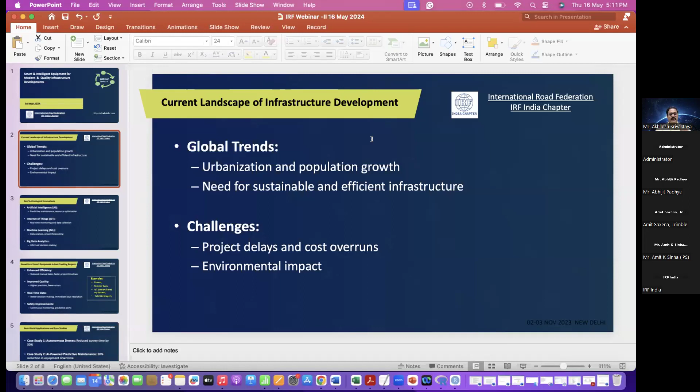As per the Government of India Ministry of Statistics data, roughly 41% of big projects are having cost overruns and time overruns. And apart from this, these delays are not environmentally friendly - they degrade the environment also. Here, if we have good equipment, intelligent equipment, they utilize the materials very optimally, thus making it more sustainable and environment friendly.

What are the trends or innovations currently happening? Our experts will be talking around these. Artificial intelligence, which is very well known - it's now in every sector. Yesterday I was talking on AI in a conference on World Telecom Day. AI has a presence everywhere, from the health sector to fintech to construction. So in construction equipment, the moment AI is put in, the optimization and predictions become a very different level. So how this is being used, we'll be talking on this.

Internet of Things, another feature which has come up and is gaining very big momentum. As per studies, by 2030 almost 70% of equipment, machineries, house and home appliances and things will be connected with an IoT device. This is the prediction of NASSCOM and many experts. So the people and things are almost real time connected - you get the data directly from the site or through these IoT devices.

Machine learning gives you forecasting and predictions, helps in decision making. This is one of the bottlenecks - it resolves the bottleneck of delay in decision making and all. Big data analytics is the outcome. When we do analytics, we come to know what are the trends, where we can optimize, what can be best done for the next project to further reduce the time and cost in that.

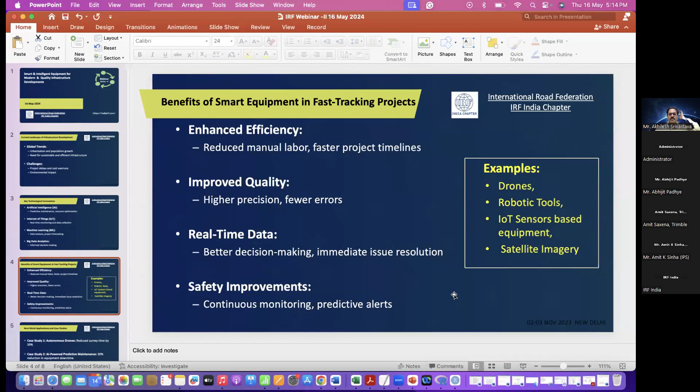And naturally, safety improvements. For example, in high-rise buildings, as is happening in many advanced countries—like I saw in Dubai—even the cleaning of the facade in high-rise buildings is being done through drones. The quality check is being done by high precision cameras fitted into the drones. Satellite imagery, which Amit will talk about, maps and tells even the growth of plants, how it happens. So there are many things. These improve safety, and people are not required to go to places which are difficult or uninhabitable.

Similarly, there are a few case studies we checked when discussing the relevance of this topic. You can see drones can reduce survey time by 50%. Instead of a person physically going there to map it, especially for highway projects, the moment you use a drone, the visibility or the idea from a height taken is an entirely different level, and gives you better comprehension about the projects. So it reduces time.

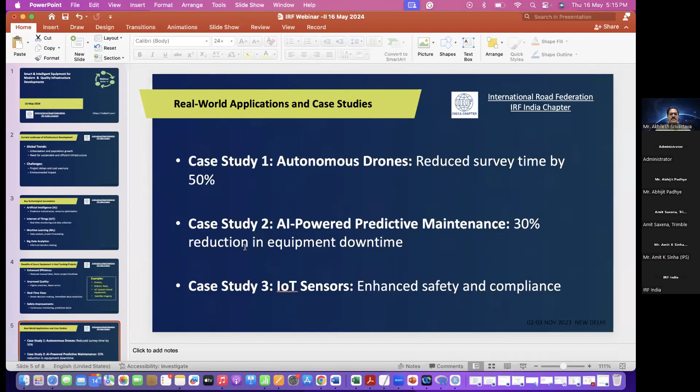AI powered prediction modules—in maintenance, the machines themselves say that my maintenance is due, or my oil is depleting, and so on. This is a study done by McKinsey which says there's nearly a 30% reduction in equipment downtime if you use this. And IoT, of course, helps for better site management or in gaining knowledge.

But there are certain challenges. The moment you put this technology into equipment or make them smart, the cost goes high. So who is going to bear it? What will be the ROI? That is a serious challenge. And the top management who haven't yet seen the benefit of this are generally hesitant. So how they are being convinced, or what should be the pitch to them—I will request our experts to talk on that.

The skill gap—for this, you require a different kind of skill on the ground to operate these things, and that is still lacking. So more capacity building training programs are required. Integration with existing systems is also a challenge, because if somebody is having SAP, then data should seamlessly flow into that system and help, rather than creating another weird system which is difficult for people to understand and cope with.

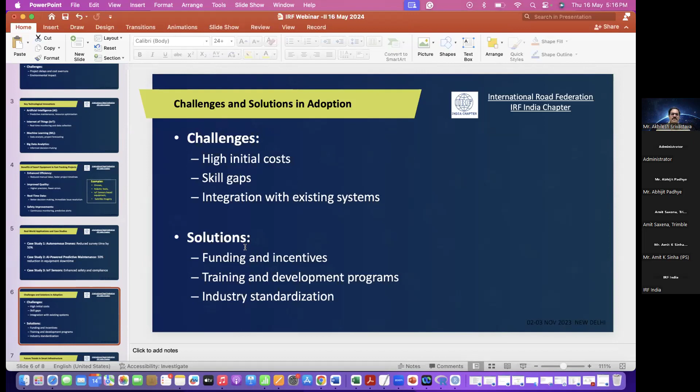And then what are the solutions? The initial cost can always be muted through different funding incentives, and a lot of work is going on in training, development, and industry standardization.

These are certain things, but there are a few more topics I just want to give a glimpse of. For example, the metaverse—I witnessed a project on my recent visit to Geneva, where the planning, the DPR, is now being made through the metaverse, and you can fit everything in. They were putting a very complex structure into the metaverse and checking with different parameters which is the best and optimal design. So metaverse is another very helpful thing.

Blockchain and 5G are the upcoming things which are going to make IoT and these equipments even more smart and intelligent.

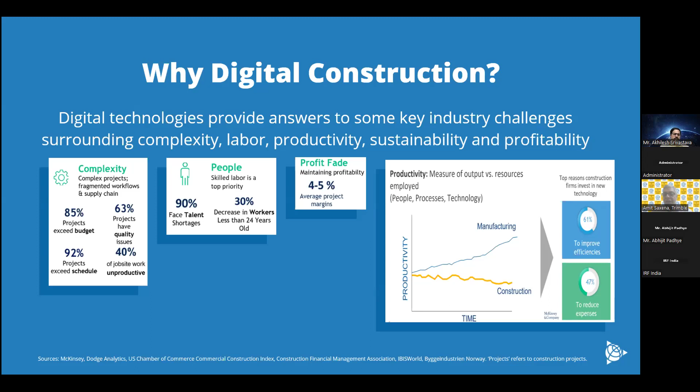We have adopted a lot of technologies on the construction side, but there are fundamental issues we need to work on. I've brought these slides to show the nature of issues we have. On the survey and design side, there is a challenge, based on feedback from our customers, that there is always difficulty in having survey data acceptance across the entire life cycle of the project. Between the preliminary survey and the detailed survey, there is always a gap in the quality of data being collected.

Integrity issues, whether the data was collected properly or not. Design facing challenges with accuracy of this data when they go out and start construction, or even while doing the preliminary and detailed survey. More importantly, how do we use this design data, which is the basis for any project in the field with highest level of confidence. And while using this data, how is construction being carried out, and what changes have to be made back into the design depending upon local conditions.

We have many examples where these technologies are getting adopted, but this is a very simple aspect we can work on. On the construction side, there are quality challenges with the machines at the construction site. Obviously, there are productivity challenges in terms of rising costs on the field, the raw material cost, and the equipment which is quite expensive. I'm sure Abhijit will talk about them.

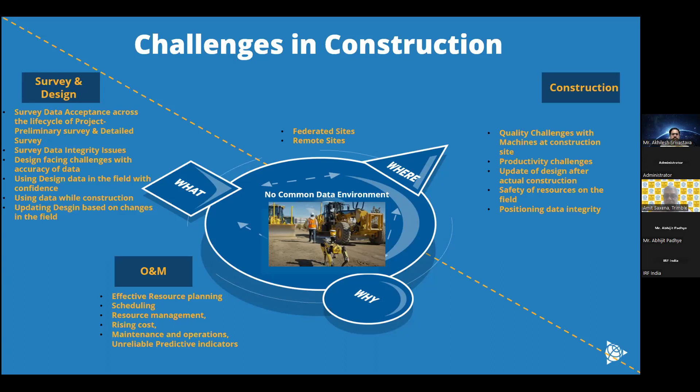One of the key areas we are working on is ensuring that the design and back office team, which is in the office, and the survey field team are working in a seamless manner. So we found a way wherein, if we start a project from the office rather than giving entire access to the design to the field, I think that saves a lot of time.

As soon as the surveyor is in the field, the project where he is collecting the data can be verified almost in real-time, without waiting for email or pen drives or any other form in which data is being transferred. So this is a very unique value proposition that we have.

Our project starts from the office, which is on the left-hand side. It's only a file. When the survey team goes into the field, they need two things. One, verification of the data in the first few hours of collection of data. Secondly, the design is also given to them while they're in the field.

They can load that design file, whether it is in the form of a scanned copy, or they have an actual design model which they can verify. And I will show you some videos that will help you understand this.

Last but not the least, we have also seen people moving from one technology to another while working. For example, people will use a design modeling software, which is a necessity. They will use different sensors in the field, like we were talking about, whether it is a GPS sensor, which is much better at collecting land data than a total station, which is a traditional form.

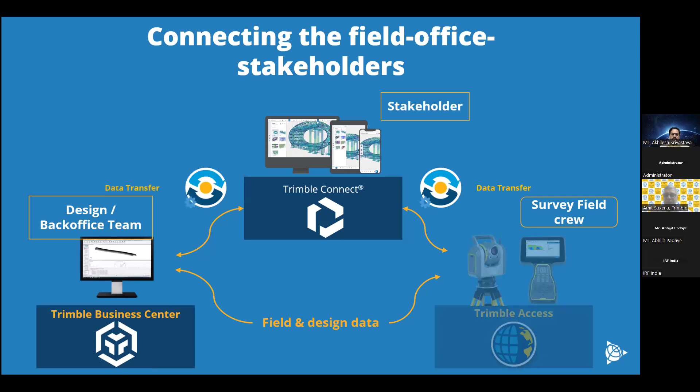So these are the devices that are used. Now, the classic example is here, wherein we can work on a model which is being created in a modeling software at a central place within the office. You don't need a modeling software for using the survey data along with it. The model can be straight away imported into the central engine that I was talking about.

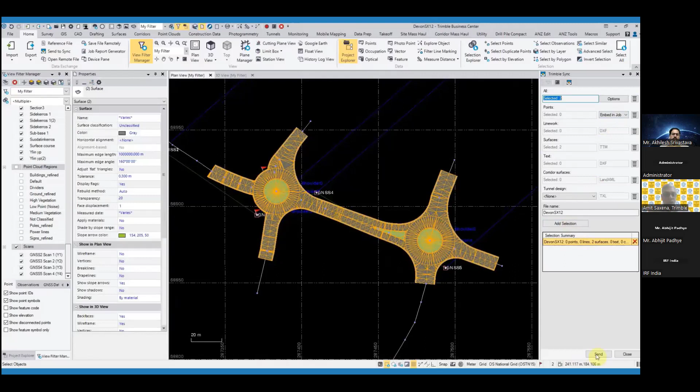Just as an example, how it could be shared with the field: in this case, there are two sections currently being used. Once they are selected in a technology called Trimble Business Center, it can be embedded into the project that I was talking about. Here you can see that the file with some level of geo-coordinate information is being added to the project. With a click of a few buttons, that folder goes directly into the field through the cloud services.

So here we are utilizing a lot of ease to share the data in the field. Which file, how it was sent, when it was sent, can always be avoided between different stakeholders. In a click of a button, the job file has been updated, and the coordinate systems, which are global coordinate systems, are also being done, and now it's embedded into the system. You can see the orange colored ones, which are the new files, and they're saying okay, create and send it across. So this kind of technology can help you integrate your design and survey data with ease.

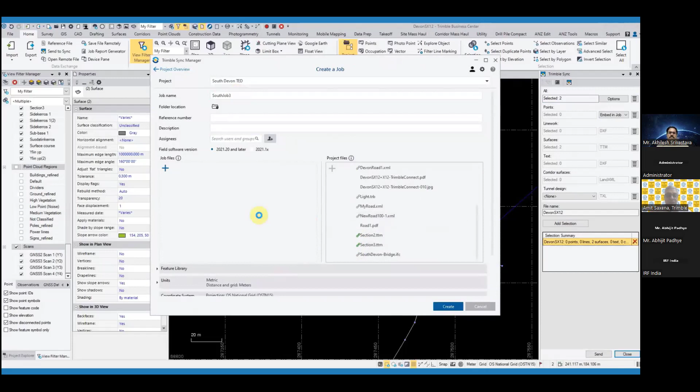So this is done. Now the next level of information is how you verify that it's a new job that is being built. When we go to the field, this is the field access. Straight away you can see on the right-hand side, once you refresh it, this symbol will change. They have two job files which are embedded, and you can download them, and you see different symbols.

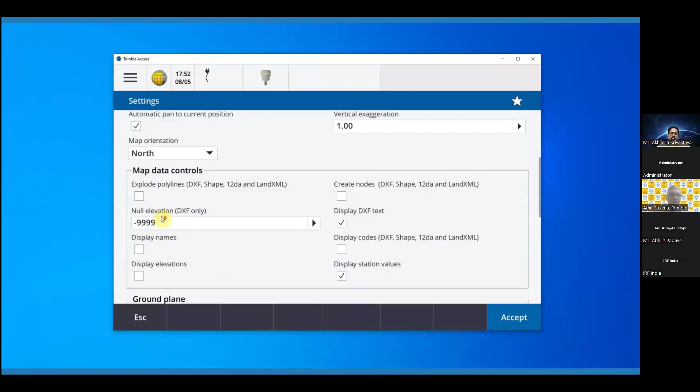So both the sections are now actually in the field on the controller that the person is using. This kind of data is now visible to them. We can make different options, whether it is a DXF file or IFC. We can decide on the basis of our requirements. See, this string is available there.

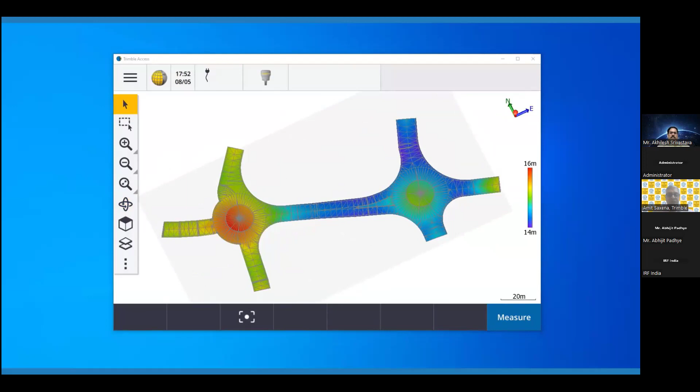Now in the background, we have also seen that people use different kinds of technologies, including Google, etc. That also is not required. On the field itself, there is a facility of Trimble Maps, which is being updated quite regularly. The same can be viewed in a different layer to check the validity of this data. Further, at the backdrop, you can see Trimble Maps is being used, and that's how you can visualize whether the design that they have created is fitting onto the site.

And also, when we start doing the integration of other sensors, like in this case the scanning is being used to capture the data which is actually physically present in the field, and they are being placed in different layers. So you can actually visualize the scan data which is actually in the field, and also the model here. So it's just a simple task for a person to have a look, and at any point of time they can switch on and switch off these layers to check whether the integrity of data is maintained or not.

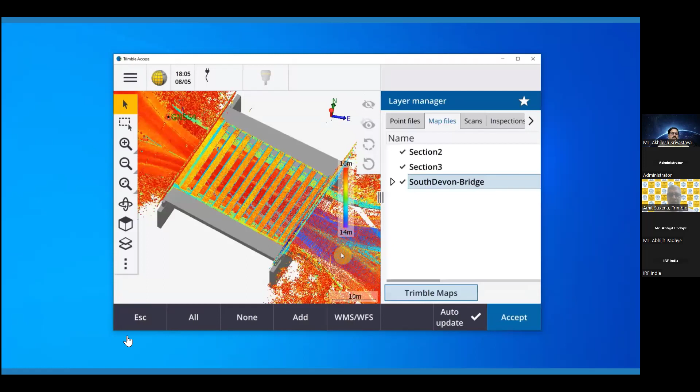So I'll keep on moving. So here they are accepting and uploading the work. We don't need to wait for the work to be done. And in this case, the inspection and the scan data is also being verified at the same time.

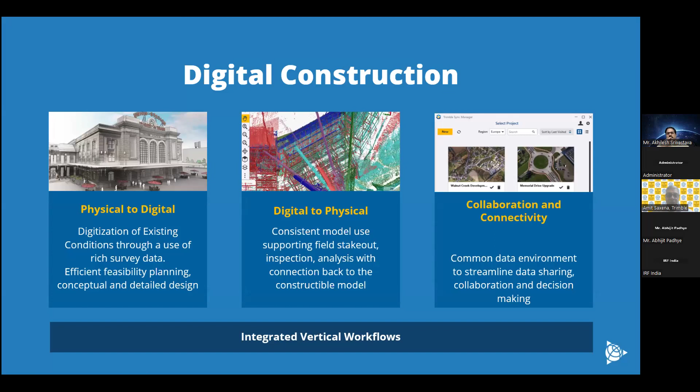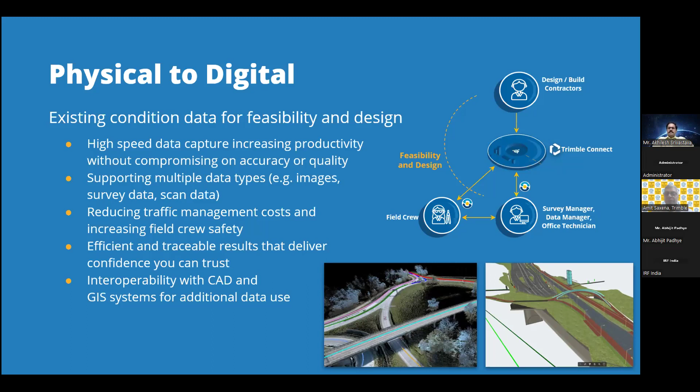In terms of the next level of requirement, how physical to digital and digital to physical world integrity is being done: a very simple task, as I was talking about. The data will be captured at a very high speed and also with highly accurate data. You can take data from drone, mobile lidars, GNSS, total station, and any kind of sensors that are available, and bring them to the same place. Without disturbing the overall workflow, through the single system, we are able to generate the data.

Same goes for digital to physical. We were talking about MR. We have a technology wherein you just need to load the model and start placing the QR codes. Once you start doing the construction, and when you stick those QR codes on the site, and scan through our technology, you are able to visualize how the construction will look like in comparison with the floor plan, or 2D drawing, or with the 3D model.

This is a classic example. I will just play it quickly. There is a sound in it, but I know there is a time that I am maintaining.

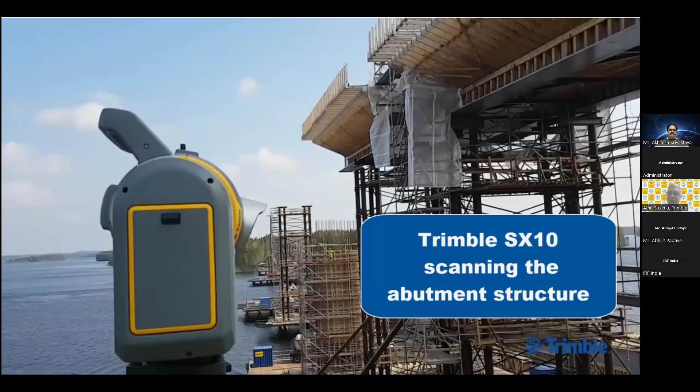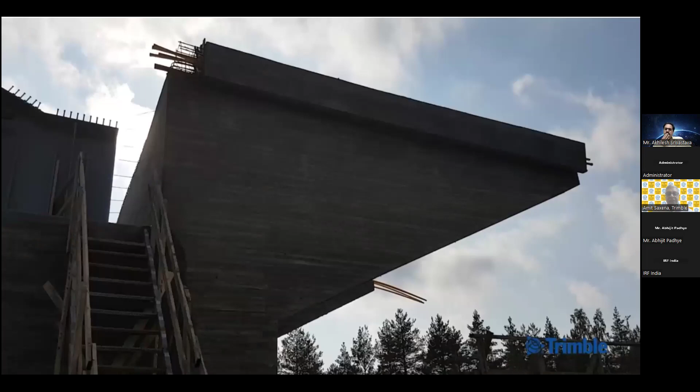This is a good example wherein the scanning has been taking place of an actual site of bridge construction. In this case, the same machine could be used for doing the total station survey, then doing the scanning, and then we integrate both design and the scan data at one place to check how the systems are behaving.

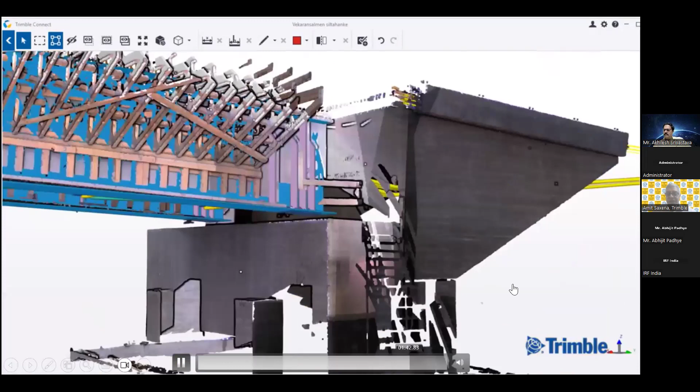Now the model and the point cloud data is being integrated in this case, so you can verify the checks and work on it. These kind of outputs can be easily generated, wherein we can check the height of the scan data or the bridge, and that can be done very quickly.

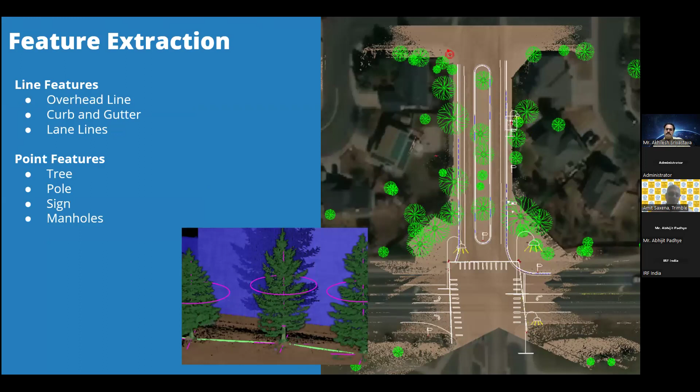Further, we can do the automatic classification of the system, including buildings, vegetation, wire lines, electrical lines, poles, etc. Even the feature extraction for environmental concerns - we can have a number of trees available in a project, and the girth can also be calculated.

In terms of one interesting concept, I think I can move on with this - another real-time monitoring example of a Tapi bridge in Surat, wherein our systems are working with integrating multiple sensors.

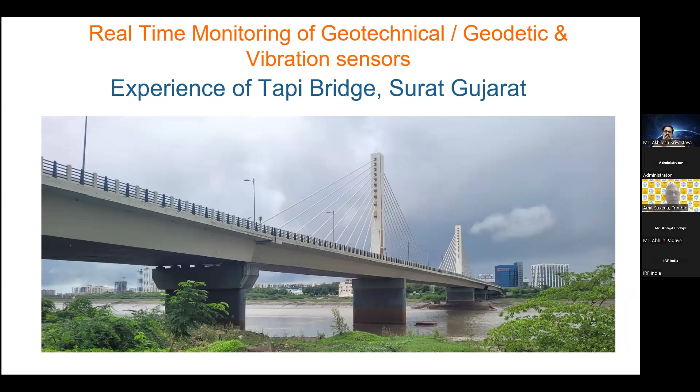This is a very nice example wherein multiple geotechnical and geodetic sensors were used. On the right-hand side you can see the GPS data, automatic total station, weather data, seismographs, crack meter, extensometer, stress sensors. They were all integrated to Trimble technology so that you can generate reports.

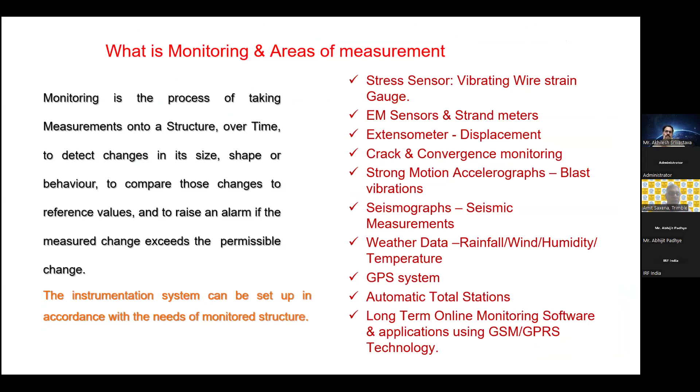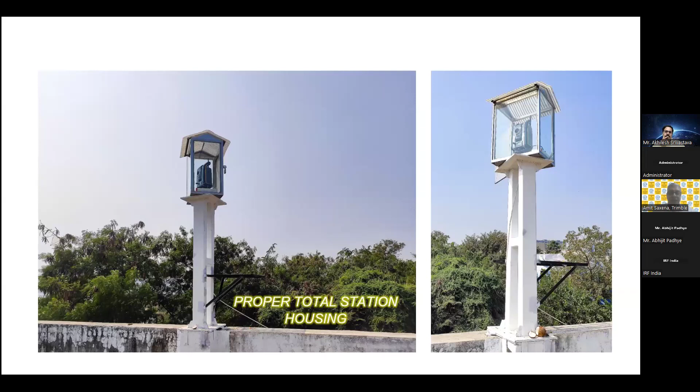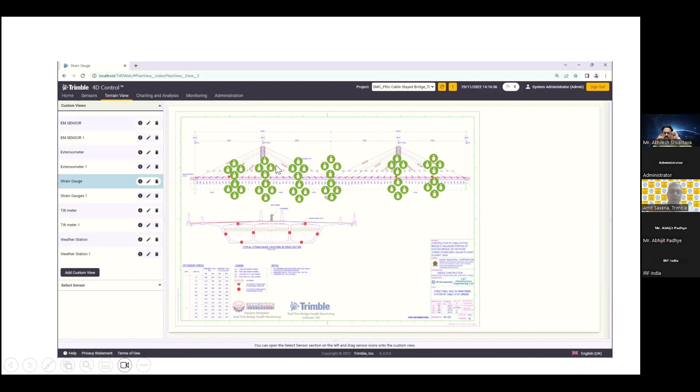You can see this kind of reports - where all the sensors are being mounted, whether they are on the cable or below that. And these are the targets that are being placed on the bridge.

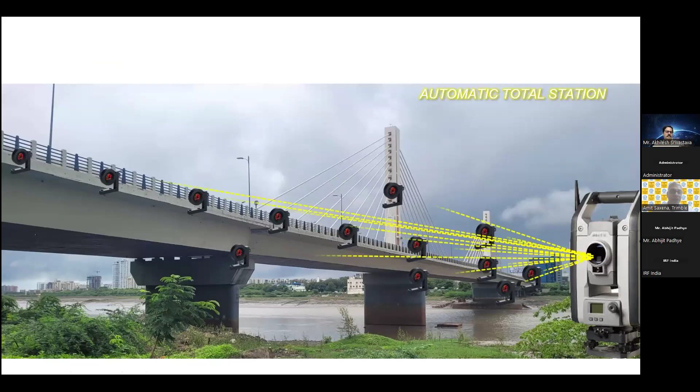So all these things, once we connect with the system, automatically the data is collected at our central place, and you can define the parameters within which the alarm will not go off. As soon as there is an anomaly, the alarm will go off or an SMS can be triggered.

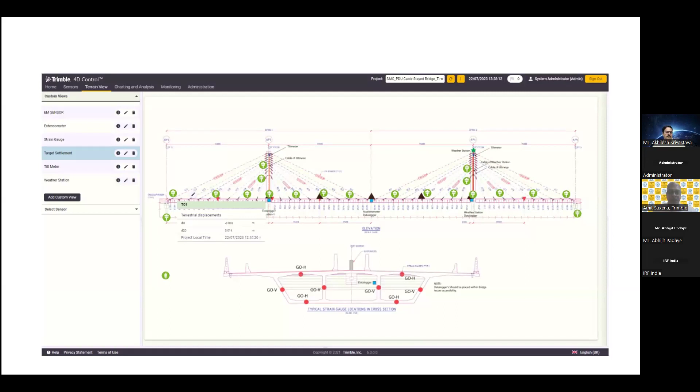Now, moving on to the construction side, I think what we are looking at is moving from conventional construction to data-driven digital construction, wherein we integrate the heavy equipment machines with our positioning technologies, and we are removing the human safety hazards, stakes and strings, and daylight constraints which are normally seen, and also the accuracy that is not being achieved. So what we are doing is using the same technology to feed the data back into the machines.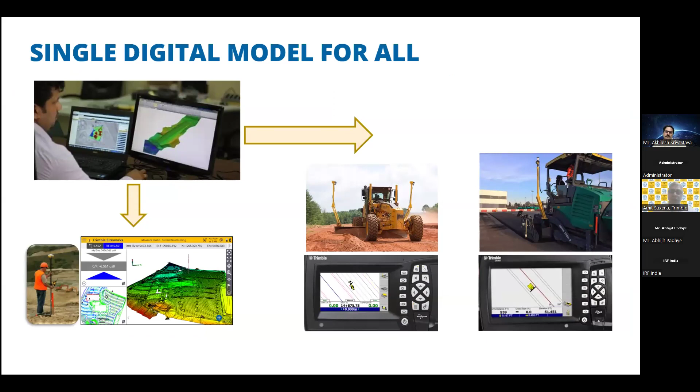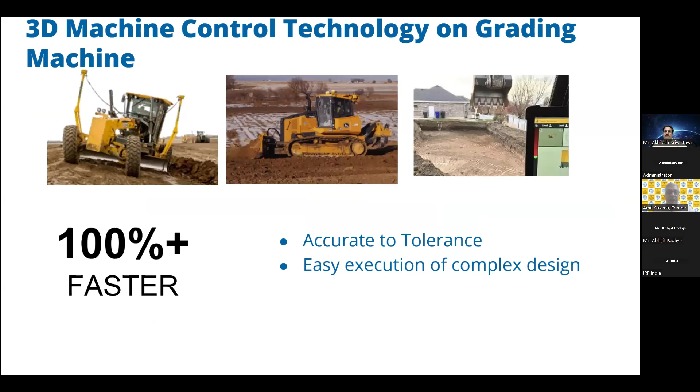We have a very good example in terms of the highway being constructed near Lucknow, wherein the work and the 3D machine technology is being used with our systems. You can see that they are faster, accurate, and this is a very good example wherein the work is happening at night, which was not possible earlier because of the positioning technology.

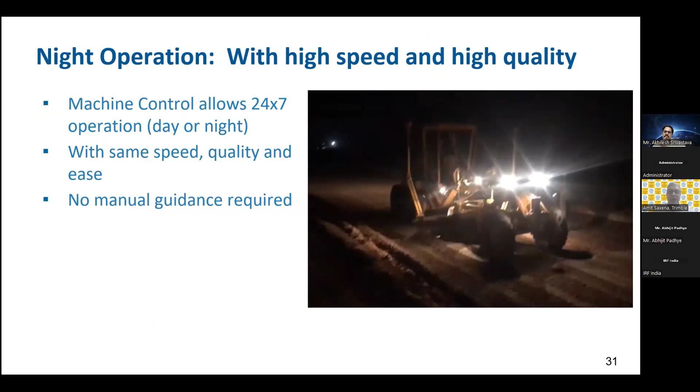The blades of the system move as per the GNSS sensors controlling the movement and placement of these blades. So these are machine-guided systems which are in the field.

If we look at the next part, it's compaction and paving, wherein we see 30% saving, and these figures are coming directly from the field. This is a very good example compared to the conventional form - this data comes from the project itself, and I think Abhijit probably would be covering this, but I'm just giving you a highlight.

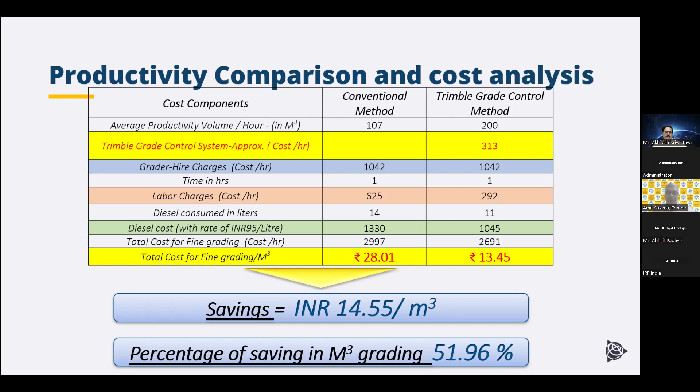With the conventional way and with the Trimble Grade Control method, you can see the cost is being reduced by more than half, with all costs being taken into account, whether it's diesel cost consumed in terms of the runs happening, or fine grading cost, or the number of charges taken for grader hire in terms of cost per hour. So there is a very high saving in terms of using our technology with the graders.

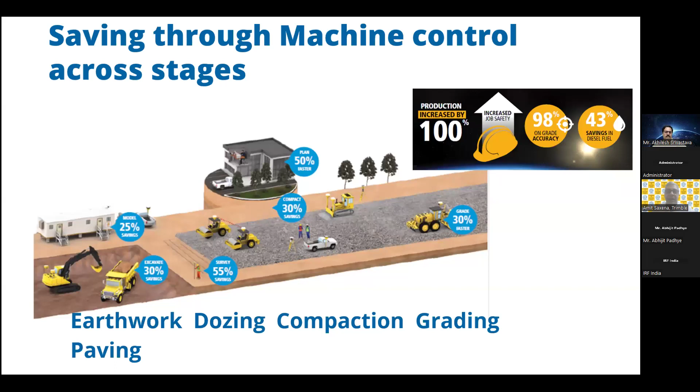And there are different steps at which the saving can happen. With limited time, I can talk about some of these, but there are many other areas where we can work upon, and we can have all these kinds of benefits.

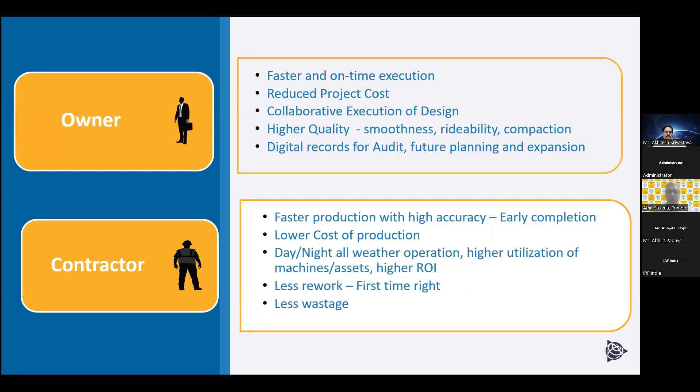And last but not the least, we take care of the environmental parameters through our multiple technologies, and these are the sensors we talk about. If you have any questions, I'm ready to answer them. This is what I have today, sir.

Thank you, Amit, thank you for a wonderful presentation. I think you explained things in very detail. I think some questions are there, we'll be taking it at the end of the presentations. No problem, sir, thank you. It was very exhaustive, I think audience must have learned a lot today.

Now moving to our third presentation today evening, to Mr. Abhijit. Are you presentation ready, Abhijit? Yeah, yes. So Abhijit is an engineer with a master's in marketing management, and he has 32 years of very long experience, served in many renowned organizations like Kirloskar, Ingersoll, Voltas, Volvo, and now he is heading business at Gainwell for allied business with products from Lintec and Linnhoff Holdings in that company. So he's a business head, let him speak and tell about the product. He's an expert, you can see he spearheaded a lot of new technology products throughout his career, from micro surfacing machine, from Etnyre to the Eurotech concrete and many more. So without taking much time, I will request Abhijit please take over and start your presentation.

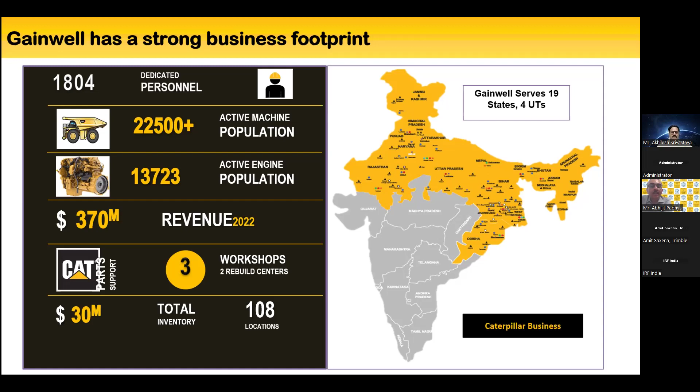Active machine population is 22,500. Out of that, engine population is 13,000. Revenue done is 370 million. Inventory again of 30 million. Gainwell is also associated with other brands other than Caterpillar, that is where Lintec, Linnhoff, and Etnyre, which we are manufacturing in India, comes into place. Other than that, we are with FG Wilson, Indocrest, with Trimble. Tulip Compression is there for compressing CNG for all the pumps which are there. So a lot of mining companies are also there with us, then Progress Rail is there. So this is a complete solution provider which is catering to varied markets in India.

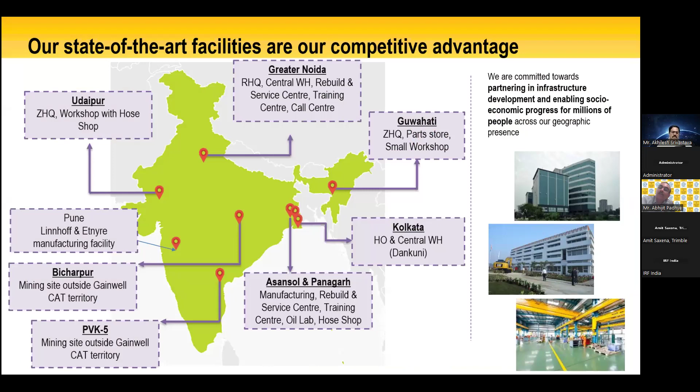If you see, we have got footprints pan India, with manufacturing facilities in three places, two places, and then dealerships, warehouse, parts depot throughout India. Our facilities, if you see, we have got in Udaipur, Greater Noida, Guwahati, Kolkata, Asansol, and even we are catering to Nepal markets from India.

This is Unnati, which is second in Asia, 17 globally, LEED V4 Platinum certified green building, and this is in Greater Noida. We have got overhauling centers, machine rehab, warehouse stocking, service engineers placed here. It's also where our management team sits. And if you see, we are giving 360-degree solutions, like apart from sales, parts, CAT certified, rentals, training, product support, everything we are doing from this facility.

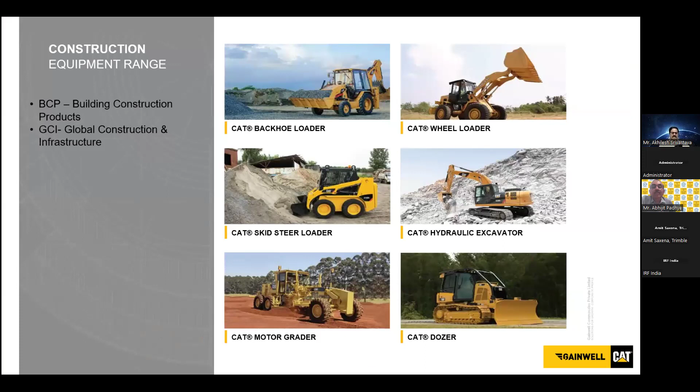The second one is our facility in Asansol, where we are again doing servicing, and it is a 5-star rated workshop facility. We have also got our oil sampling lab here, and it is a state-of-art component rebuild center as well. Our products in Gainwell, which we are handling, is all the CAT range of products - backhoe loaders, wheel loaders, skid steer, hydraulic excavators, graders, dozers.

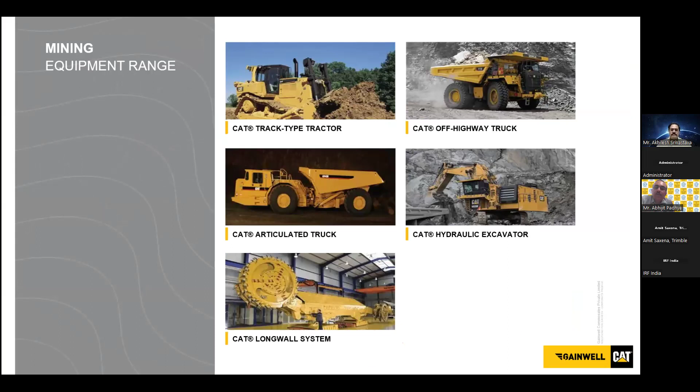Then the mining equipment like the dozers, off-highway trucks, ADTs, and even the long wall mining systems, which we manufacture in our Panagarh plant. Then we have got the engine, the powertrain systems, DG sets associated with it, the gas generator sets. Nowadays we are also in hydrogen compression.

So these are the new and green technologies which have been associated with Gainwell for almost 75 years now. So how do we do it? What are the smart things we are using today, and how are we transitioning the whole process to a digital ecosystem? When I came into Gainwell, I was surprised seeing this, and this is the way it has to be going for the new business ahead.

So this is the age of digital disruption and innovation. We have a mobile application, and even the CAT parts and genuine parts business is being done here through a portal. So most of the business is being done through the portal nowadays.

If you see Gainwell's advantage, they have a strong dealer network, and CVA offerings like parts warranty and extended warranty. Then we give scheduled health sampling, machine rebuild capacity, timely auto-alerted EM solutions, customer interface mobile apps, Wanijya, the e-commerce website, loyalty programs, 24/7 customer support, virtual assisted service, a workshop on wheels, and rental and used machine offerings as well.

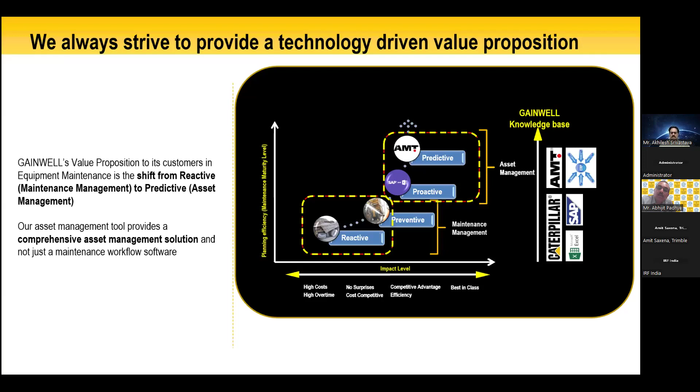If you see this chart, we have shown the impact levels and the planning efficiency, the maintenance maturity levels, wherein asset management and maintenance management are clearly defined. It also shows high cost and high time overruns, and we are trying to overcome these impact levels and move ahead to best in class.

We have this CAT Connect strategy, which is like linking all the equipment together. All the machines working on site provide information and communicate with each other. So we have 13,800 connected assets, which form 95% of the eligible fleet.

So the data is received from these assets in our centers, where we do condition monitoring, and then we leverage technology. We do this by fitting these devices with different types of antennas and probes, and we try to connect, get the data, interpret the data, and then reduce the cost and risk associated with it.

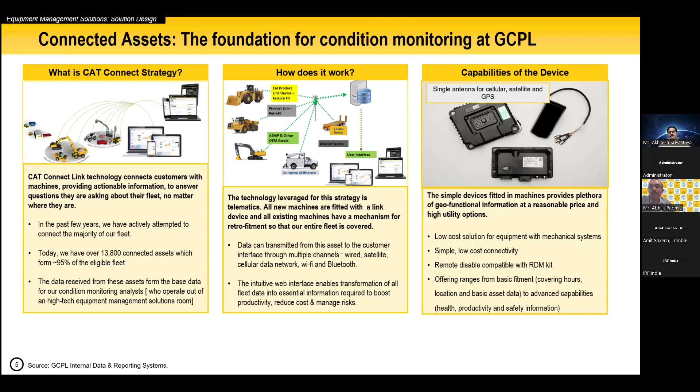This telematics system helps us with equipment management solutions, addressing customer pain points like the lack of real-time data available for the performance and quality of assets. So we want to give technology solutions to the customers.

So we use seamless digital lead management systems for fault code management, asset tracking, fleet benchmarking reports, equipment inspection, and even monitoring fluid samples like oils, fuel and coolants on the machines. This helps us get the best life of the system and the mechanical components, and condition monitoring is also done.

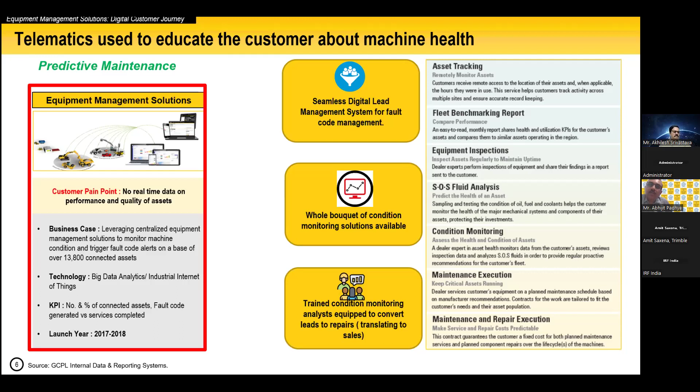We also do maintenance execution to keep the critical assets running. Since we are a key contributor in the mining field, where assets work for almost 20 hours, all these parameters are really helpful to keep the cost of maintenance low, keep the machines running, and give us the highest productivity.

Coming to the next range, this is where I am heading. We have got the Linnhoff asphalt batching plants and the concrete batching plants. We manufacture these in India at Gainwell, with two factories, one in Asansol and one in Pune, producing different ranges of plants.

Now, being process plants, we have different probes throughout the plants which give us valuable data. We can connect these plants through SCADA systems to the whole laying sites and get important parameters recorded, with feedback given to the system, helping the contractor improve his efficiencies and reduce his cost.

Other than these plants, we are introducing in India the Etnyre range of machines, which are microsurfacing and slurry sealing machines. Microsurfacing is basically a machine which mixes sand and asphalt, bitumen, and lays it on the road. And slurry sealing is like a premix which you have to lay on the asset.

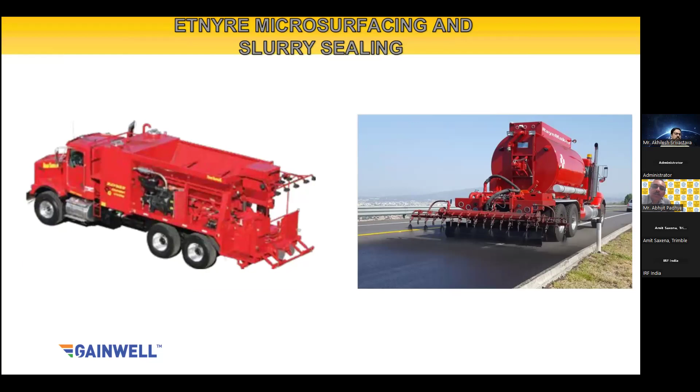So these two machines also we are manufacturing in our Pune factory for the global exports for Etnyre Corporation. Other than this, we are also into crack sealing machines.

Nowadays, a lot of road assets will require maintenance for the next 20 to 25 years. The proper way, as per our maintenance practices, is first fill in the cracks, seal the cracks, then do maybe a micro or a slurry, or recarpeting. So these machines, again, were not made in India and were specified but not used by contractors.

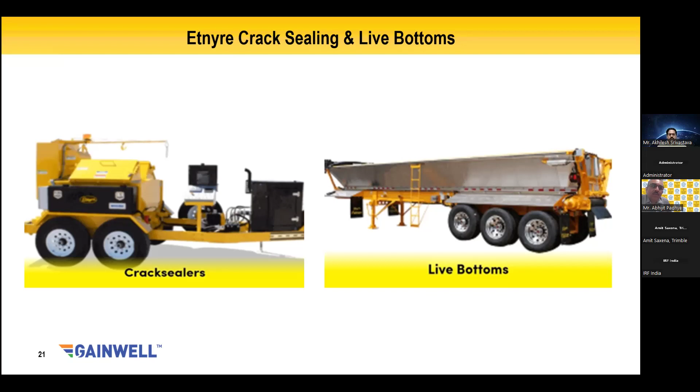It's a new concept here, and the floor is a moving floor. So all the asphalt material or even the aggregates will be transported, and when you have to unload it, it will not tip, but will just flow out of the system. This is a machine which is the need of the hour today in most construction sites, because when the tipper tips, it may lose balance, fall on one side, and cause accidents.

So this is where we are getting these types of safety related transportation solutions, which will help us a lot going forward. I will go to my next slide presentation. This is what Gainwell does.

Now coming to the Trimble part, like why machine control technology? India aspires to be of USD 5 trillion GDP by 2024, and we require high-speed execution at optimal cost and high quality.

So this is where, as Mr. Amit had put in, we require the need of the hour for us to use smart and intelligent technology to get the best out of our machines. We have to maximize returns on investment for precious public funds utilized by integrating project design with machine control, significantly compressing timelines, reducing overall cost of execution, and improving safety at site.

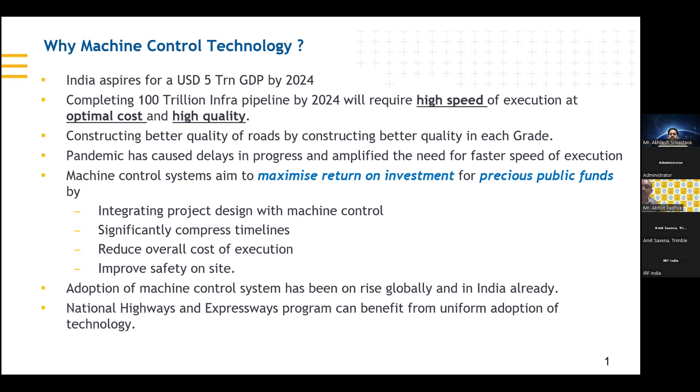Now, by adopting these technologies, it becomes a transparent process for the authorities, with everything being documented. The repetitive occurrence of human mistakes can happen, but the machine doesn't make these mistakes. So your quality improves a lot by using these tools.

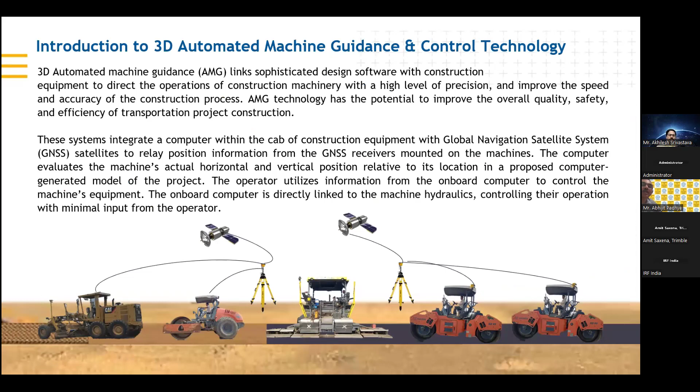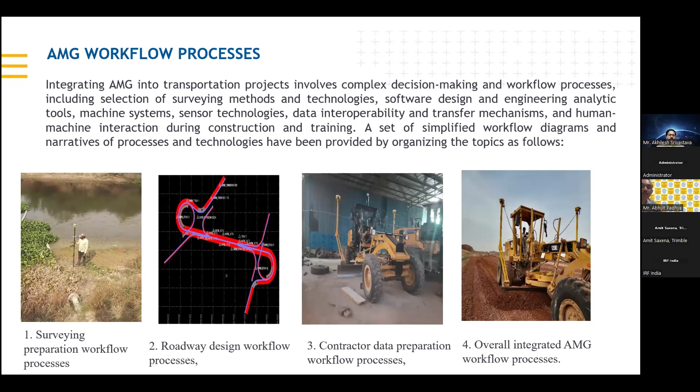So we are introducing, as Amit has said, I'll just go ahead. This is a 3D automated machine guidance system linked with the design software for construction. Amit has already taken this through surveying, preparing the workflow, roadway design, data preparation, and overall integration of the AMG workflow process. I'll come to the graders now, what we do and how we adopt this to a grader.

You can see this. The valve package is put in the machine. Then the valve module is there, the power module to drive the whole thing. The operator display will have a visual connect on the full machine showing what is happening. And when you put in all the required data, it will compare the XYZ axis coordinates as well as the actual road conditions, then evaluate and guide the system.

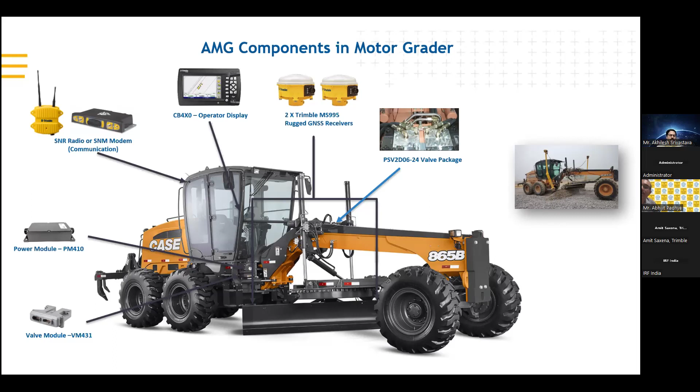For getting all the data, you will have the radio communication and also the Trimble receivers. These receivers, if you see in the photo right next to it, are put on 2 masts, which take all the signals. So this is how any grader works—I am showing you a CASE grader, which is my competition machine, but we in Trimble have also adapted our systems to CASE graders and other graders as well, and it is showing tremendous results and cost savings for the contractors.

And for paving, you can see how in a paver, normally we require a total station, whereas for the other two we can do with GPS. Total station is required because in paver you require an accuracy of less than 5 to 6 mm. That's why we are using a total station, and we can have very accurate coordinates and positions input into the machine and output accordingly.

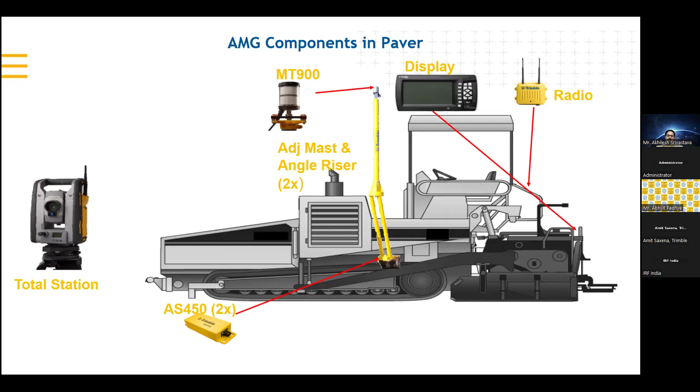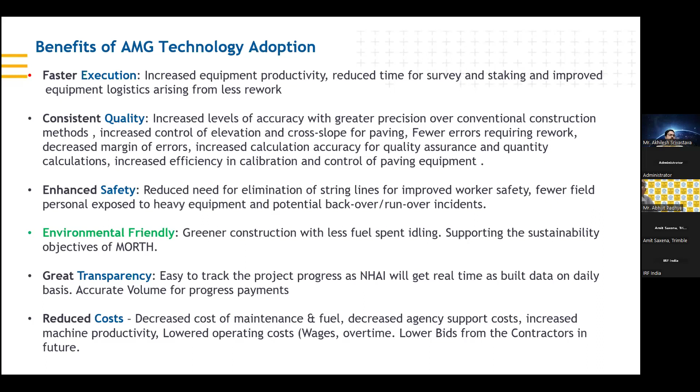So benefits of using this are faster execution, consistent quality, enhanced safety, environment friendly, and greater transparency. This transparency is a boon today for the NHAI officials as well as reputed contractors. At first they were resistant, but once they started using it, we saw a flood of people wanting to use this, and a lot of site controls come into picture because of this, and overall cost is reduced by using these systems. There are advantages to the authority, and advantages to the contractor, both are having benefits.

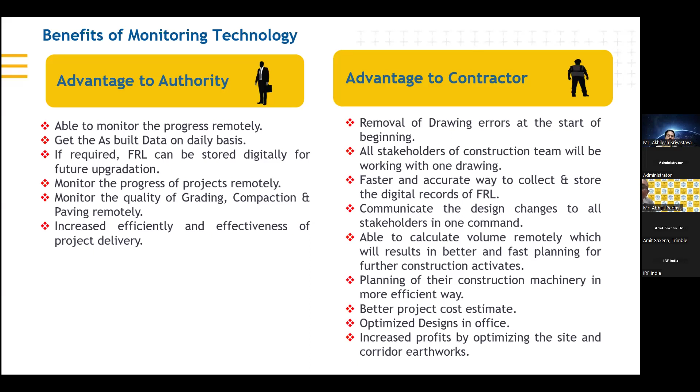We have put in small points saying how authorities like monitoring the progress, getting as-built data, FRL can be stored digitally, progress can be monitored, and grading, compaction and paving can be done remotely. So authorities sitting in their chair can also get all the data. Contractors benefit from removal of drawing errors, and all stakeholders of the construction team work with one drawing. It's a faster and more accurate way to collect and store digital records, and communication of design changes to all stakeholders happens in one command. You're also able to calculate volume remotely, giving better results and faster planning, planning construction machinery more efficiently, better optimization of project cost, and increased profits.

All these things we have actual data for, from a project we worked on in Lucknow. We saw a lot of savings in OPEX, fuel, operator, maintenance, and it happens in real time. So even manpower saving is there; less manpower is used for doing the same repetitive work. In compactors again, authorities as well as contractors are really getting good results.

I can tell you about a project we did in the Pune region, around 9 years back, when SCADA system was first introduced in an asphalt batching plant. Compactometers were put in for measuring compaction and the temperature of laying. In that, the PWD Pune circle in charge had put a condition that no bill will be passed without getting all the authentic data from the compactor and from the plant. Due to this, there were two advantages.

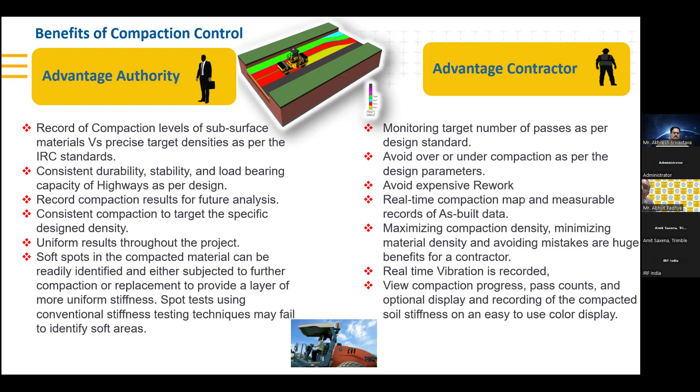If the whole system is in control and the speed and progress happen in a controlled environment, then you can really use all the funds and create a positive environment for execution of projects in the region. This is a very good example which I could see in my asphalt field as well.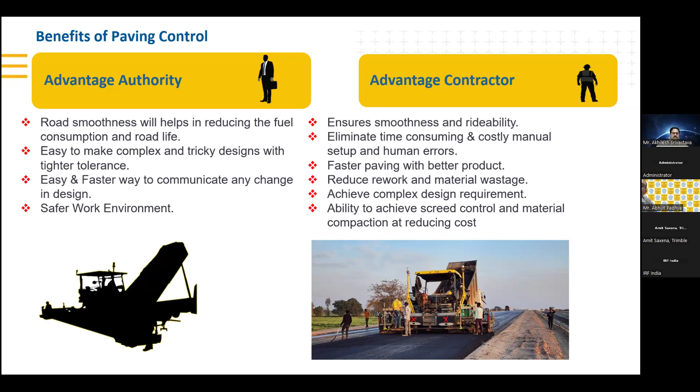Setting up is a big challenge at site, because normally you can see cycle guys running over the string lines or cattle going across. If you have everything set up on the machine itself, you really don't require that, and errors are reduced.

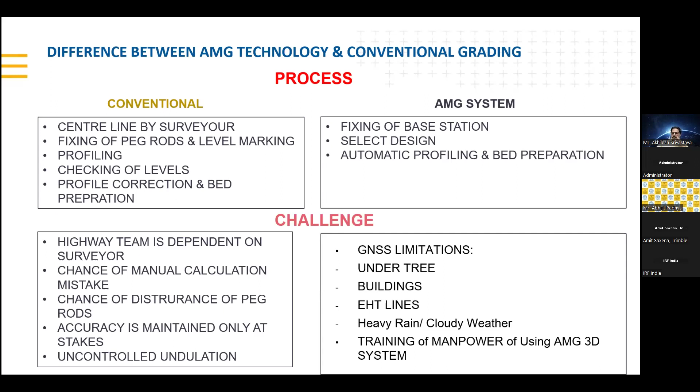I will just show you a small film.

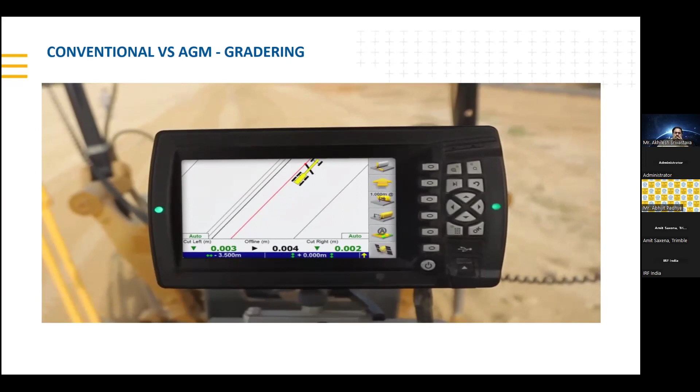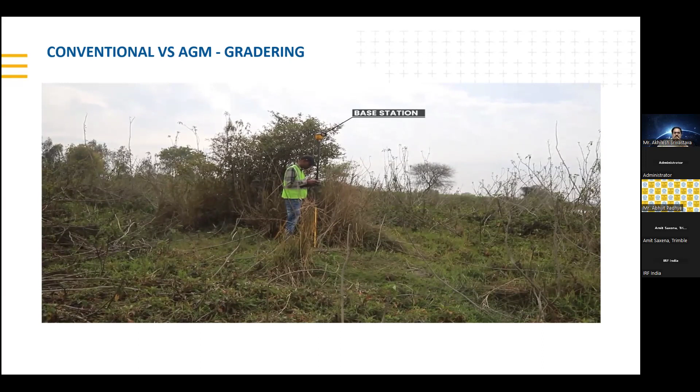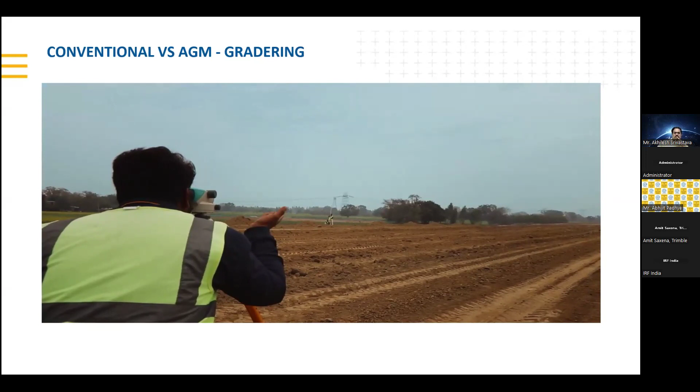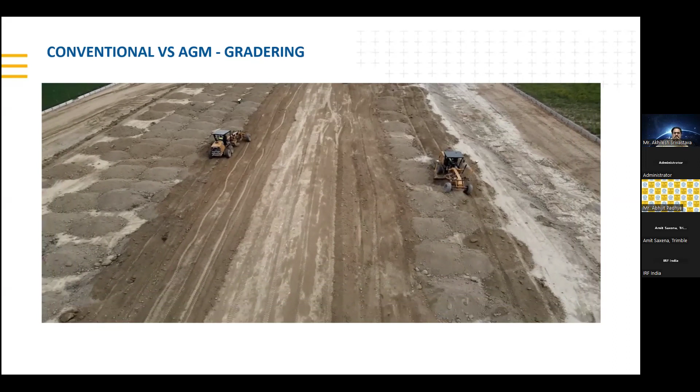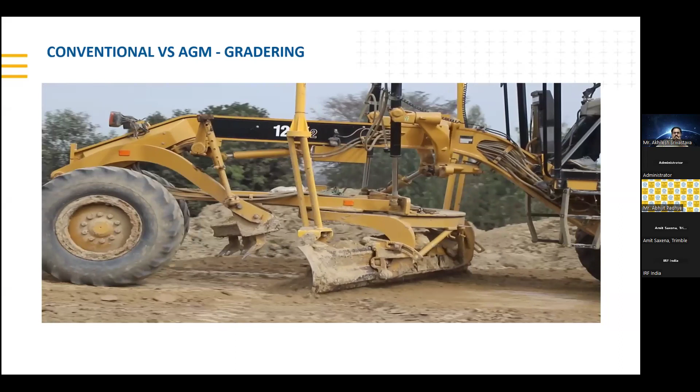The operator starts grading by breaking the keys. In the conventional method, the operator breaks the key and works from manual guidance, whereas with the technology system, the operator breaks the key and the profile is done from guidance received from the display. The operator follows the cut and fill data of the profile, and this is spread accordingly.

In the conventional method, the operator has to stop each time so a worker can check the levels, which can lead to measuring errors. Whereas with the technology system, the determination of levels is automatic.

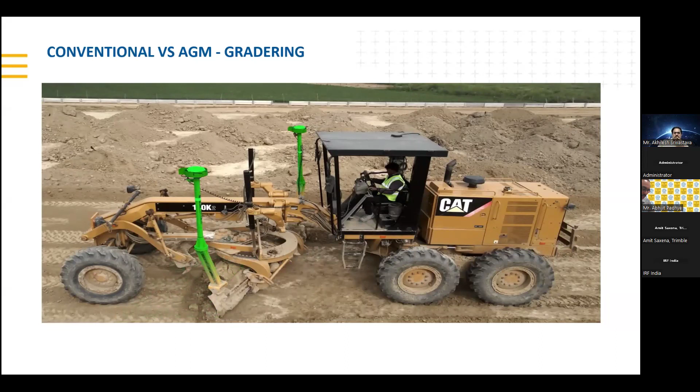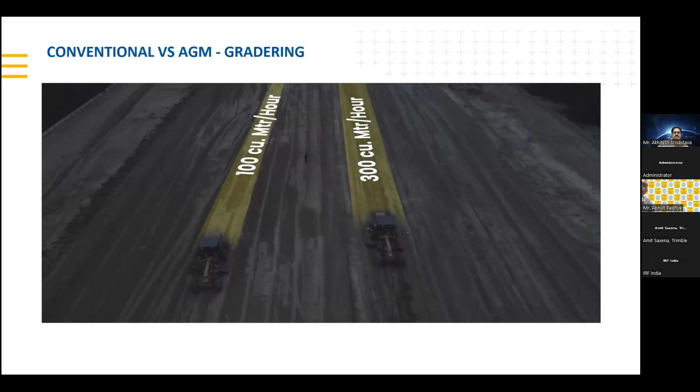The productivity achieved using the technology method is 300 cubic meters per hour, whereas you can achieve only 100 to 120 cubic meters per hour using the conventional method. One can work day and night with the technology.